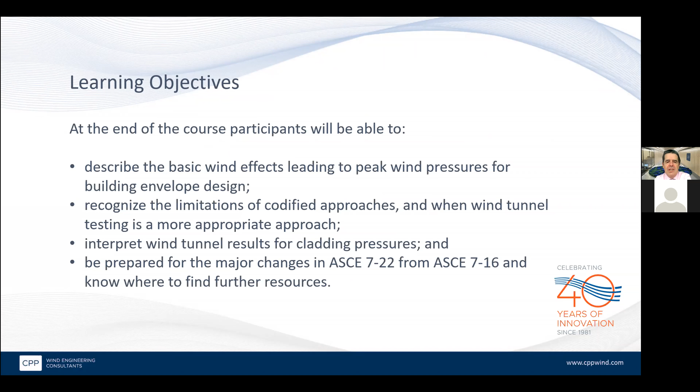There we go. So this presentation is being submitted right now for AIA accreditation, so hopefully we'll get that through in the next couple of weeks, but these are the wonderful AIA learning objectives, which you can happily ignore while we talk through the rest of it.

So you're probably all aware of the codes. I mean, there's just a collection of them from 705 to 710 to 716, the ASCE SEI loading standard. And what you'll have noticed is that every time they republish one, it keeps getting bigger. But does it have all the answers? No, it really doesn't. There are limitations, and the code itself does recognize the limitations.

This is just to remind you that the new 722 has just come out. I don't have a physical copy of it in hand yet, so I don't know quite how thick that is compared with the others, but we have taken some stuff out, and we've put a heck of a lot of other stuff in. So it's probably gonna be a little bit thicker again.

So the code does kind of limit you in what you can use it for, the standards. It says you can use the standard to get the wind loads, the local building envelope pressures, if it complies with the following conditions.

The structure is a regular shaped structure. Well, that's open to a bit of interpretation, and I don't know many architects who like to consider their work as particularly regular shaped. Then the second condition, applicable to building envelopes, says it doesn't have a site location where you're going to see channeling effects or buffeting in the wake of upwind obstructions warranting special consideration.

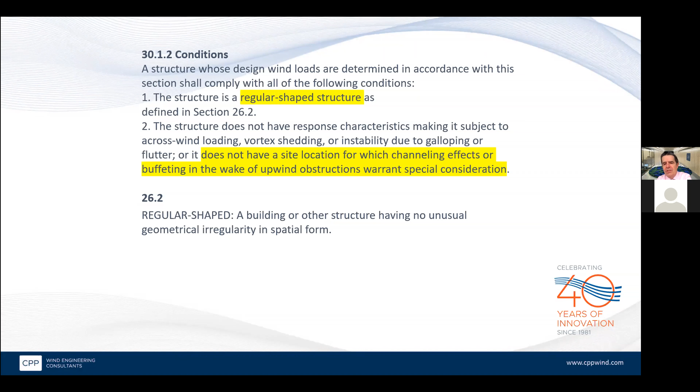Where does that start and finish? Just a box? Yeah, arguable. So we'll look at some examples of things that you can consider regular shaped, and a few others that definitely fall out of that category.

So let's just look at some of the basics first, though. Here we've got this is just a time history of wind, showing wind speed in some non-dimensional unit. Let's just call it miles per hour up the left, and then time in seconds along the x-axis there.

And what you'll see is we get three components to the velocity. We've got the longitudinal velocity, so that's the speed in the direction of the wind. And then we have a lateral and a vertical component. And you'll see that all three fluctuate. As you'd expect, the lateral and vertical components have a mean average wind speed of about 0, whereas your longitudinal has that very definite mean value.

But that fluctuation is the turbulence in the wind, it's the gustiness. And that's what makes what we do very different from anything like wind tunnel testing of cars, planes, or aerodynamics of more regular, much smaller bodies. Because when we're doing buildings, they're much bigger than the size of a lot of this turbulence or gustiness in the wind.

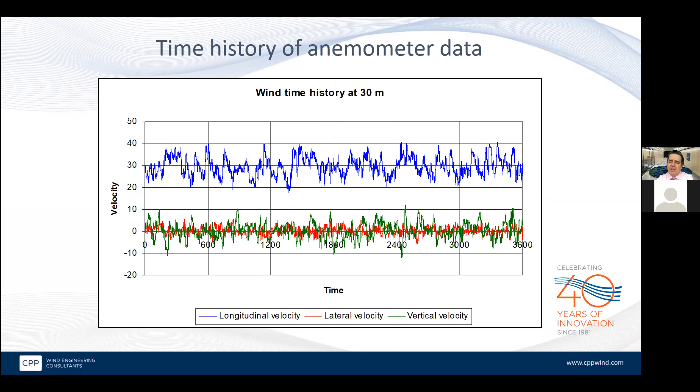It's a function of that. All the pressures are a function of this gustiness, and we'll keep coming back to that.

The first bit of everything we do in any wind loading study, looking at pressures, is to say, what do we know about the wind speed with return period or mean recurrence interval? Because that determines what you pick based on the standards in terms of the levels of reliability that you want to achieve. So typically, if you're thinking a risk category 2 building, you're right on your 700 years. Whereas this is just an example graph from a petrochemical facility we were doing, where they have to design for a 10,000 year mean recurrence interval.

And we also have to look at any site at all the different types of storms. So what you'll see is the pink line there, and that's a statistical fit to historical data from usually an airport somewhere or some other meteorological station. So what we do is we go through however long, usually looking at 10, 20, 30 years worth of data.

And we go through and we sort out all the individual storms, and we rank them. And then we plot this, what we call a Gumbel fit to it. And that gives us a curve of wind speed versus mean recurrence interval.

This one was not that far inland from the East Coast, so we had to consider hurricanes. Hurricanes are a thing that you don't have enough historical data on to be able to fit. So that's done through what we call a Monte Carlo simulation. And that's used throughout to come up with the wind speeds, and the hurricane course is in the code as well.

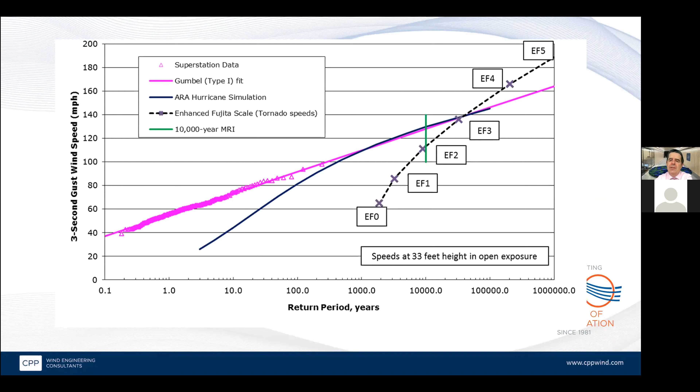Now that was just the all direction wind speed we looked at in the last graph, but we also need to consider how does the wind speed vary with direction. And this is the big difference between doing a wind tunnel study for building envelope pressures versus using the code.

So the code is going to give you one wind speed that comes from all directions and then allow you to use a Kd factor to get a little bit of a reduction. And we will talk about the Kd factor because it's something that is not well understood by a lot of practitioners in the field, what it actually does. And we'll have a little example of that later on.

So what you see here is we've calculated the wind speeds from all directions. We then scale that up, the green, so this is actually for Seattle. We got 98 mile an hour design wind speed for risk category 2. So we've scaled that up and we then put a lower bound on those wind speeds as well, so that there's no direction that we're giving undue attention for. And that's usually to get a pressure factor of about 0.67, give or take.

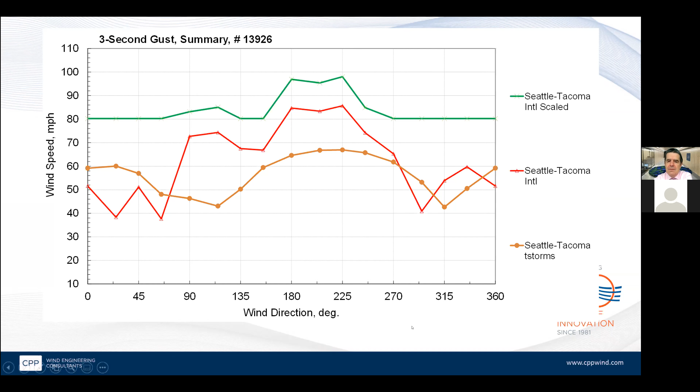So what we've had in the States, as we've had in many other countries around the world, is mid-90s or so, the introduction of automatic weather stations, which meant we get much more reliable, more consistent data. We've also updated our statistical analysis techniques a bit, so that lets us trim things here and there.

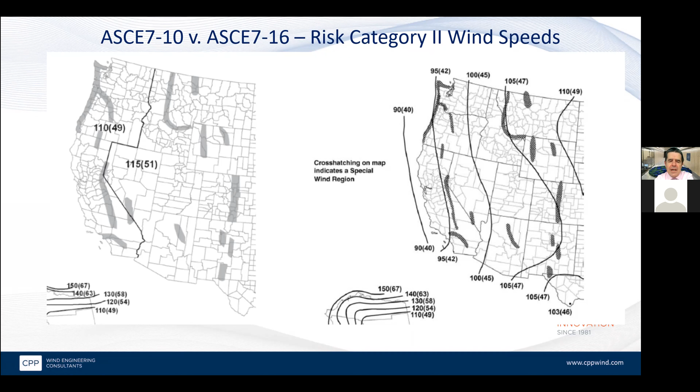And that caused a bit of controversy within the code, but at the same time, it took some of the stuff that had been adjusted correctly, and went back to an earlier version, which wasn't quite as clever. And what we're going to see when we look at the 7-22 map a little later on is that that has been adjusted in a number of these areas and been corrected out for the next version. So just something to be aware of.

The other bit that we talked about, or we need to talk about, is the boundary layer. So this is again what makes it different from working in nice, smooth flow, uniform flow like you'd do with a more aerodynamic thing.

The wind speed increases with height above the ground, or more correctly, it actually slows down the closer you get to the ground. And that's just from the surface roughness, the obstructions on the ground, creating a frictional effect and slowing the wind down. So if you're in a very dense urban environment, you slow it down more, you're going to see that effect on the wind speed for a greater height. It's going to be gustier. So that's really going from right to left, your exposure category D, going to your C, to your B, and then what used to be an A.

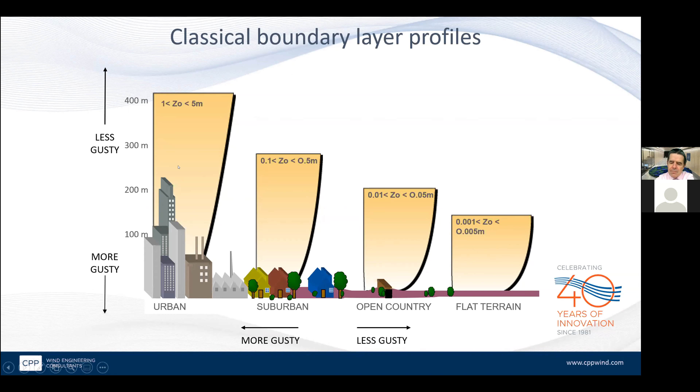And when we come to do our wind tunnel test, that's something that we need to be able to mimic or simulate.

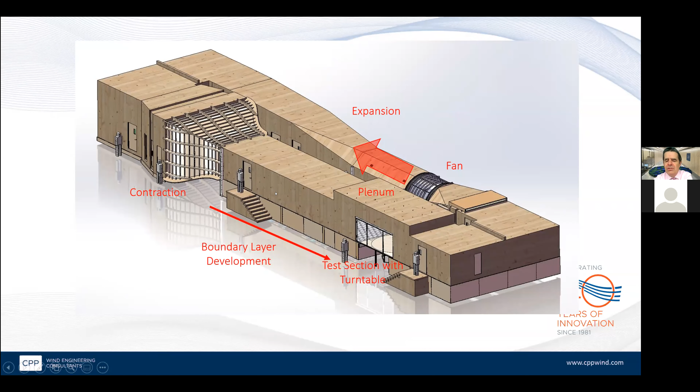So if we look inside or on the outside of a typical modern boundary layer wind tunnel, you'll see it's pretty big. Here's our wind tunnel technician standing around. They're usually reasonably tall, so let's just say they're about 5'10". Gives you an idea of the scale. So this section here, where you see boundary layer development through the working section, that's about 70 feet long. So it's quite a long thing. We get a good 100 feet total length of the tunnel. Fans around the back, and the flow circulates around. And that's what it looks like on the outside.

So fairly substantial. If we look on the inside, here's what we've got to model that boundary layer. And there's some key bits here. So you'll see we've got some spires.

We've got a little trip board, adjustable in height, and there's roughness on the floor that's also adjustable. So we adjust that for every direction to correctly mimic the boundary layer we'd expect from that direction based on the far field roughness upwind.

Then once we get in closer to the building we're testing, and this is just a little one in Austin, what we've got is all the surrounding buildings, usually within anywhere between 1,200 and 2,000 feet radius of the site.

That's the radius we'd expect to have a measurable specific influence on the building we're testing. The turntable lets us rotate it, usually tested at 10-degree intervals, and we rotate it round and test all those directions to get a complete picture of the variation of pressures with wind direction. So we can then pick, or calculate, the appropriate pressure for the appropriate mean recurrence interval.

Roy, we had a question.

Are the number of spires variable? Yes, right, but no. So technically, yes, they are. You could do that, but we don't. We used to, in the old tunnel, we'd do that, but now they're set up so they slide up and down and give different blockage. But if we wanted to go in and change the number for some reason, yes, we could do that, Nathan. Okay, thanks for that, Chris.

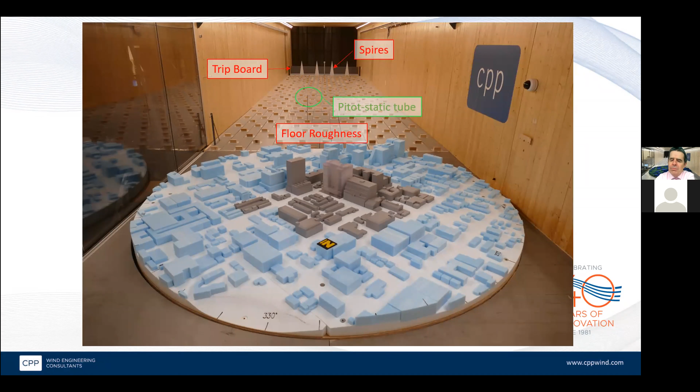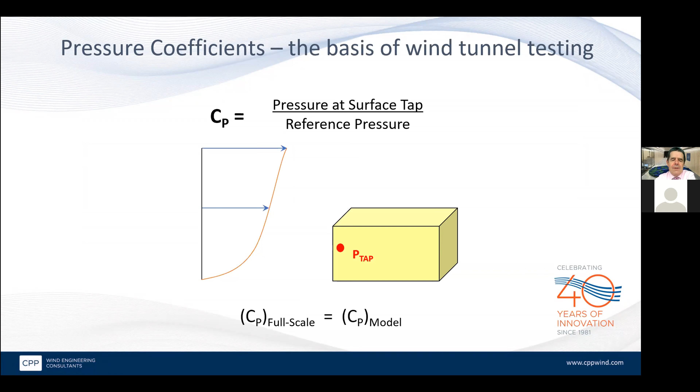That gives us our reference pressure in the wind tunnel. Then we're measuring pressures at a tap, a little hole in the building model, and that pressure coefficient is the same as the Cp you see in the codes and standards. The pressure at that surface tap divided by the reference pressure gives us that pressure coefficient. When working in the boundary layer wind tunnel, in turbulent flow with sharp-edged bodies, that pressure coefficient at full scale is the same as the model scale one we measure. That's the basis of absolutely everything we do, and it's what we call Reynolds number dissimilarity. We can get away with it.

So let's just look a little closer at one of these models. This is probably a fairly irregularly shaped building in the middle, a Frank Gehry special. It's the Grand project in Los Angeles, which we worked on with a good structural engineer, DCI, Scott Erickson and his team, a few years ago.

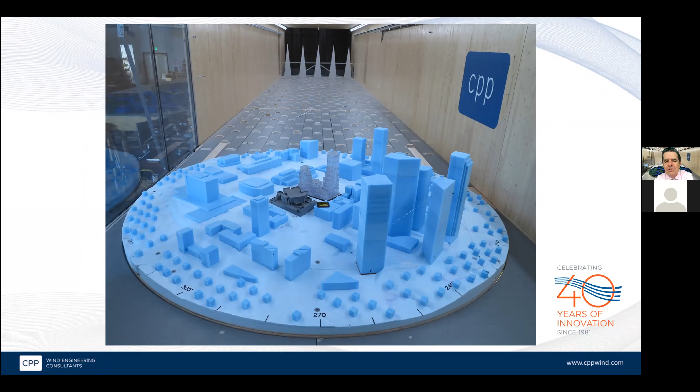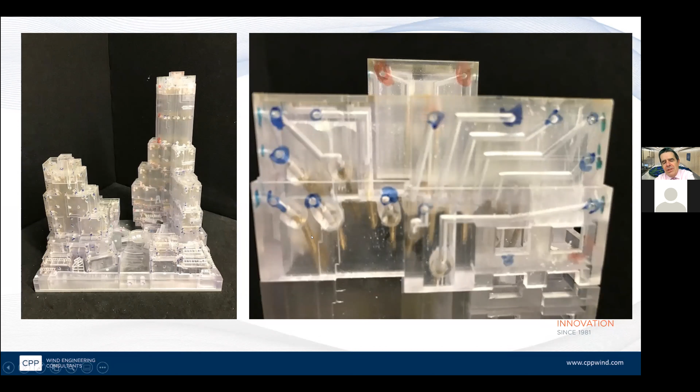If we look at the model, this one had somewhere in the range of 1,200 separate pressure taps distributed all over it. If we zoom in here near these roof fins, you see the little hole marked out in blue, then you see that tube being drawn through the model, and little bits of brass on the inside. If we look at the inside, that's what you're seeing, all those little brass connectors going into the holes through to the outside. Then they all get connected up to this spaghetti of tubing that disappears through the floor of the wind tunnel to these banks of thousands of pressure transducers underneath.

So whenever you do some of this wind tunnel testing, you spend a heck of a lot more time doing the setup and the calibration, the preparation, than the real testing.

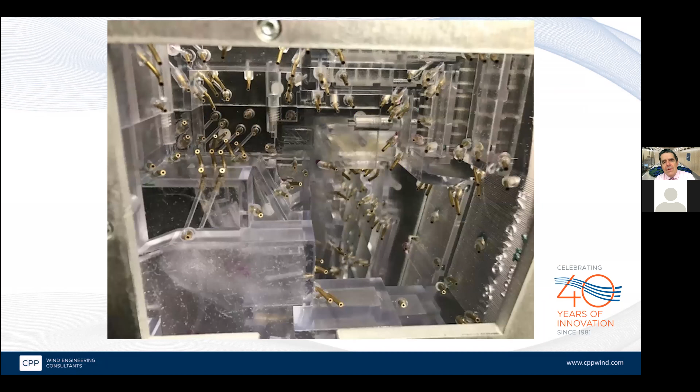Do you have a maximum number of those? Yeah, so we've got two systems that run at 1,024 taps each at the moment. In theory, if we ever needed to, we could double them up and piggyback them to get 2,000 at once. But what usually constrains you is, if you look at the inside of the model, there's only so many tubes you can get out through the bottom of the model at once. So it's usually a scale constraint that limits how many you come out at once.

This picture here is a particularly large number because this was under the model on top of that. That picture was the Marina Bay Sands project in Singapore, which had this huge convention center roof, so we had a massive area underneath for bringing out those pressure tubes.

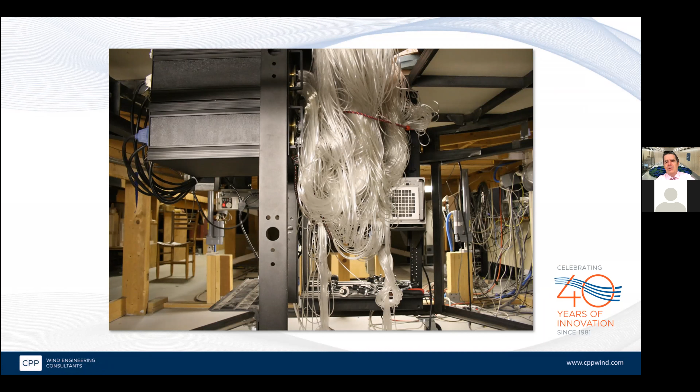One thing to remember is, where did all those code coefficients come from? They came from wind tunnel testing. So rather than a generalized set of coefficients put in the code to try and envelope the majority of building cases, we're getting something building specific. We're ensuring that design reliability is met, but we're also able to show that those code coefficients are conservative in a lot of areas for individual buildings.

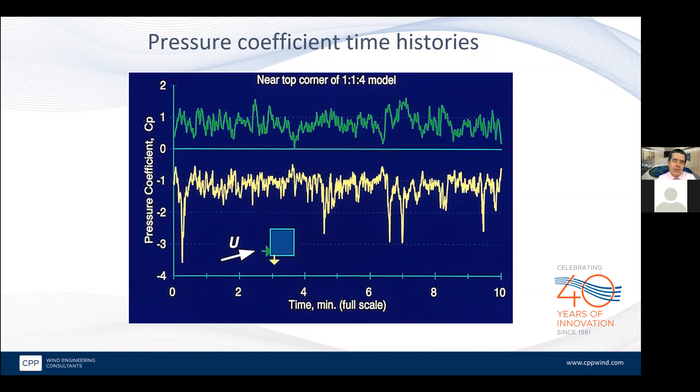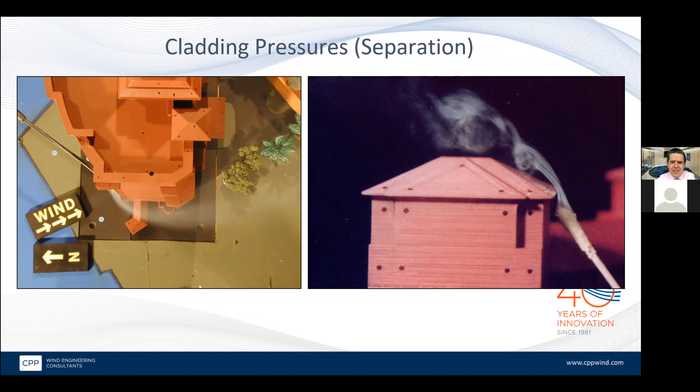I should say this picture on the right was back when we were allowed to use nice smoke that gave really good pictures for this kind of thing. They've kind of banned us from using that now - some health and safety nonsense that when it reacts with water, it turns to hydrochloric acid. So you did used to get the occasional stingy eyes and burning lungs if you'd been in there too long.

But here's another example, and this is just a little movie. Let me just make sure I get the sound off on this. There we go.

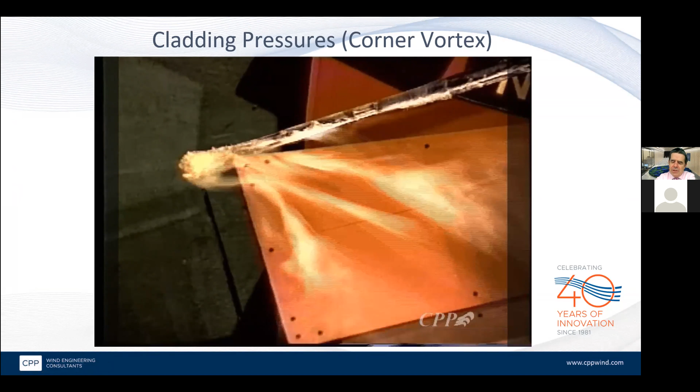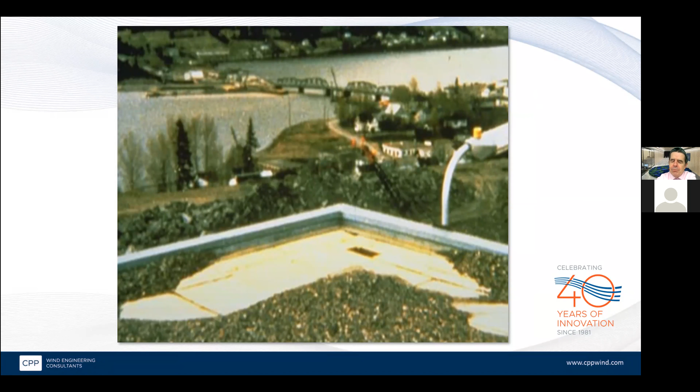And you go, well, actually, yes - here's an example. This is actually 30 years old now, this picture. It was from the Burger King headquarters after Hurricane Andrew, I believe in '92, and you've got that perfect V scar. When you're thinking about green roofs, landscape roofs, we kind of know that you're not meant to put gravel up there, but this is the same effect we're seeing - consistently scouring out some of the green roofs and preventing them performing in the way they've been designed.

It's an interesting one in that we developed a lot of the science for doing this on the basis of failures that had been observed. And as sometimes happens with these things, we had manufacturers who initially didn't like the loads that we were coming up with and saying these are the recommended loads.

After Superstorm Sandy came up the East Coast, probably about 10 or 12 years ago now, you had a whole bunch of these ballasted roof mount solar arrays end up in piles in the corners of the roof. That's when they started saying, all right, maybe you guys did get it right.

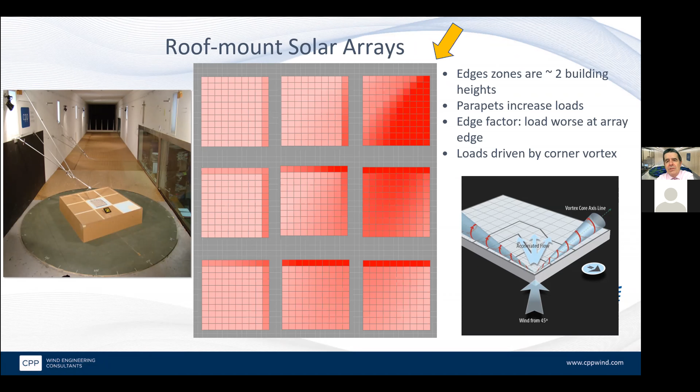And so a lot of this work has gone into the numbers that are currently in the standards for doing this. But what you'll see is the edge zones extend about 2 building heights in from the edge of the roof, and the loads typically go up when you add the parapets. So just important stuff to know.

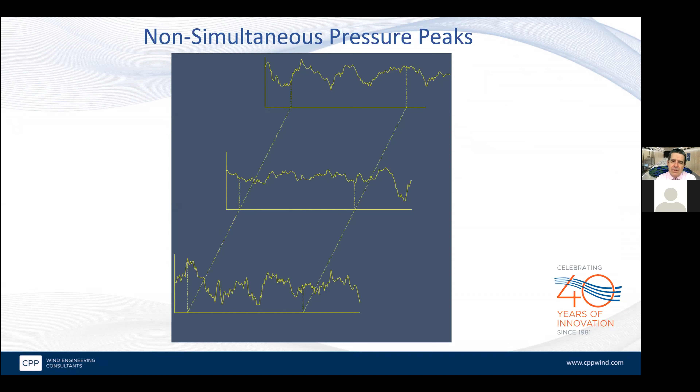The other bit that is very important in everything we do - this is just three graphs of pressure time history at different locations across a roof with time. What we're showing here is that when the peak occurs in one, the bottom one there, the pressures are lower elsewhere. And that's why we get the area reductions in the code. So the bigger bit of building envelope you've got there that load shares, then the more the pressures come down. And it's just that area apart.

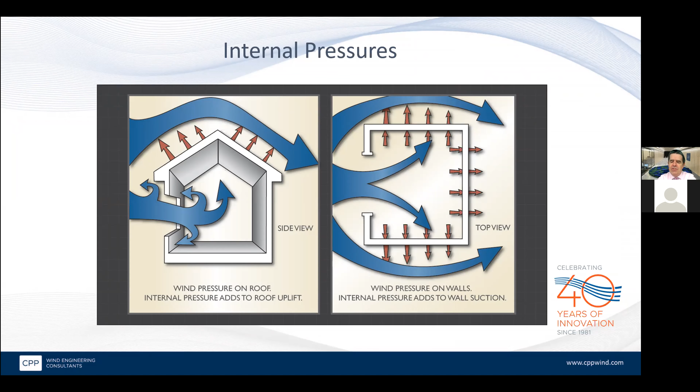The other bit to be really aware of is your approach to internal pressures. So you've got the external pressure caused by the wind, but if you've got any leakage or openings in your building envelope, then you develop an internal pressure. And that can work for or against you, depending which side of the building you're looking at. But generally that gives you an increase.

So what you'll see is these are the classifications that are in the code. You've got enclosed buildings, which have a pressure coefficient of 0.18. And you say, yeah, that's because not much wind is getting in there to leak in.

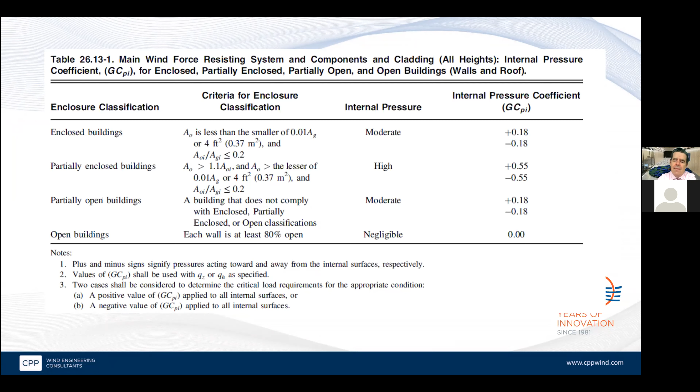You're partially enclosed buildings, which says, well, actually we've got a fairly small hole or something getting closer to a dominant opening. Then that pressure coefficient potentially goes up because more of that pressure can transfer to the inside of the building. Then a partially open building, you're saying, well, actually we've got so much leakage that most of that pressure is getting back out again. And open buildings, which are pretty much as you see, there's not enough building enclosure to generate that internal pressure.

So this is a building you might recognize, being in Seattle. It's the Nexus building on Howell Street. And it's a nice little example of how we do a little bit of wind tunnel testing.

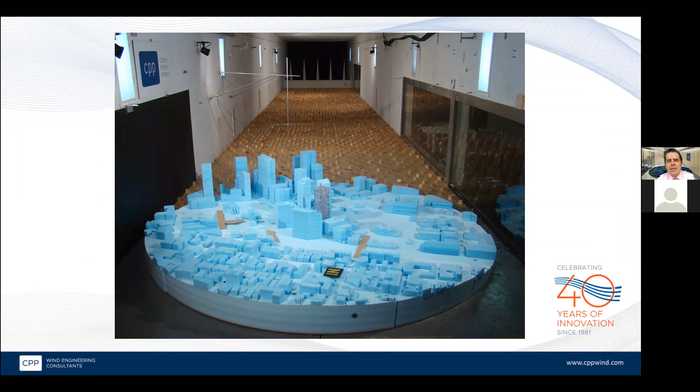So there we go. There's the building with its nice proximity model. We had about 1,600 to 1,800 feet surrounding that in the model, with Seattle as was. But what I'm going to show you is we ran 2 tests on this one. So the building - you've got those sort of stacked, slightly rotated sections with some indents every so often. So the question came up, is that hurting or harming our wind loading?

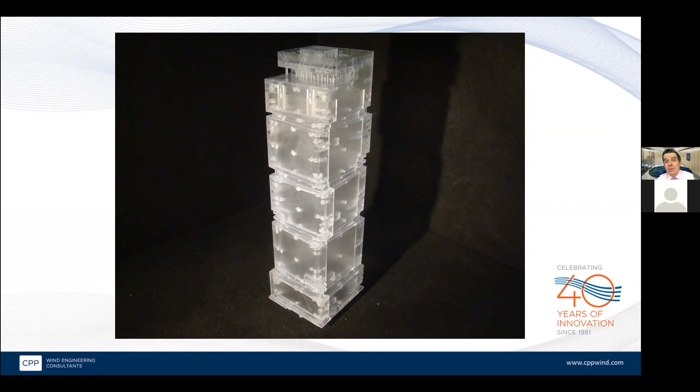And the structural engineer, who's KPFF on this one, was interested in that as well. So we said, all right, tell you what, let's run a more standard model as if you just had that uniform floor plate going straight up and down. So that's kind of what we've got there.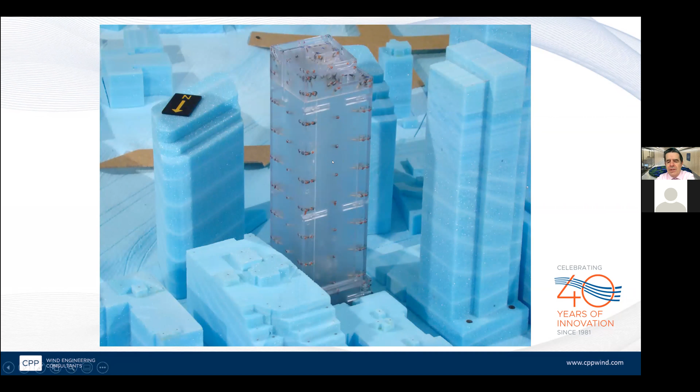In this case, it became reasonably straightforward in that you've got typically higher negative pressures near the top of the building where the wind speeds are higher, reasonably moderate pressures in the middle of the building, and then typically, once you get down a little bit lower, you'll often find the pressures increasing again. And that's because you get washed down the face of the building.

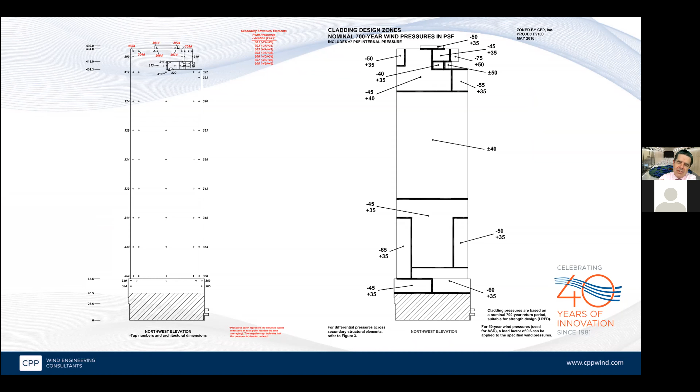And then this wind says, right, how do I now get around the building? So it's getting down near to the ground, it's being swept around, so you get this accelerated flow around the building. It's the same thing that gives you those gusts of wind or that accelerated wind as you walk about the city and go around the corner.

I think that actually answers an earlier question that I didn't get to. Yeah, but we've got another from Brett asking about apartments.

What type of enclosure classification does CPP recommend, considering that windows may be left open?

So the enclosure classification is always a discussion with the end client or tenants, depending what you've got, in terms of building management plans, as well as the degree of operability of the facade. And that's very dependent on the wind climate as well. So for instance, if you're working down on the Hurricane Coast in South Florida, for a commercial building, they have very advanced hurricane planning and building management procedures, so you assume that's closed - you get days and days of notice. Most apartment buildings there, you're going to assume they're going to be sealed in that event.

If you're working somewhere with a more thunderstorm dominated wind climate, that's one where it's not as predictable. It's quite likely someone's gone out to the shop and left their windows open in their apartment. So it's always a discussion with the client. If there's a reasonable possibility of parts of the building envelope being left open, then it can be wise to consider it being partially enclosed. But again, it's a discussion with the end clients and the whole design team to determine what's most appropriate.

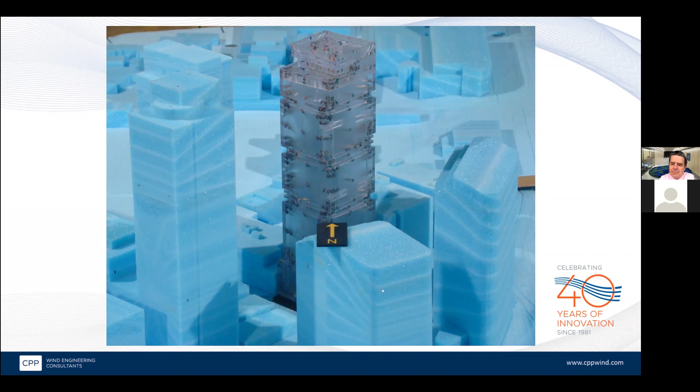So that's one where we looked at a potential change in building shape. This is another one where we looked at an actual change in building shape - this is the UAE's pavilion at Expo 2020 in Dubai, where it's designed to look kind of like a falcon. It's a Calatrava project, with these feathers coming around. The falcon is a big thing in the UAE and the Arab states, a great prestigious thing - it's kind of their national emblem and animal.

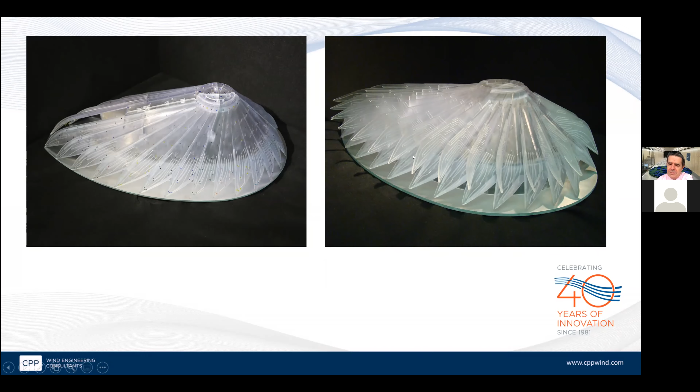These feathers lift up to reveal solar panels underneath. So in this case, because we've got multiple different forms, primarily we just run them fully open or fully closed - it was a building that had to be tested in two different formats. And that's definitely something you could never say was a regular shaped building. What you'll see there is the wind tunnel model, which looks remarkably like a photo I took when I went out there the other month to look at it as built. You'll see these pressure tubes running through the material, and they're always almost in pairs - that's to let us measure simultaneously the pressure on both sides to get the net load on those open wings.

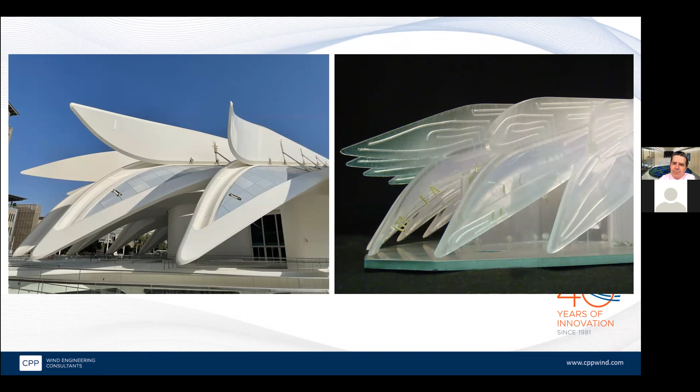So that's one where you've got an obvious change in the aerodynamics between those two conditions. This is another interesting example of where the aerodynamics potentially change. And this comes back to what you should consider for your internal pressures.

This is the Las Vegas Raiders arena in Vegas. I don't know how many of you have seen it, but it has this huge opening, where you can get a view down of the strip from inside the arena. Massive doors slide open and create this huge opening. So that's one where we worked with the whole team to say, here are the pressures and the load distributions with these closed. We also tested with them open, so we had to measure pressures on the inside as well.

Then we worked with the team to come up with a management plan, because out there, thunderstorms are going to give you some of your highest wind loads - how to forecast them, how to come up with a plan for closing the doors if they're open when the weather service says there are thunderstorms in the region. Then a backup plan if there was an electrical failure, to be able to manually close them. And then a full reliability analysis to show that even if they did get stuck open, here's the level of reliability you have left, here's our additional capacity. Fascinating project, but again, it goes back to that internal pressure question.

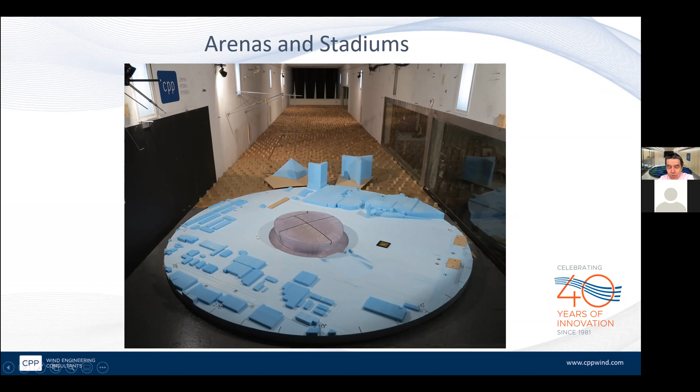Other fun things at the moment: paver systems, loose-laid paver systems. These are a couple that didn't work so well. A lot of these just rely on their self-weight, and you'll see these ones are pretty skinny, lightweight. You get the same uplift pressures on those. If the uplift pressure exceeds the weight, then they're going to take off. Once the first one goes, you tend to get this cascading effect, because now the wind can get down into the cavity and just start peeling them back.

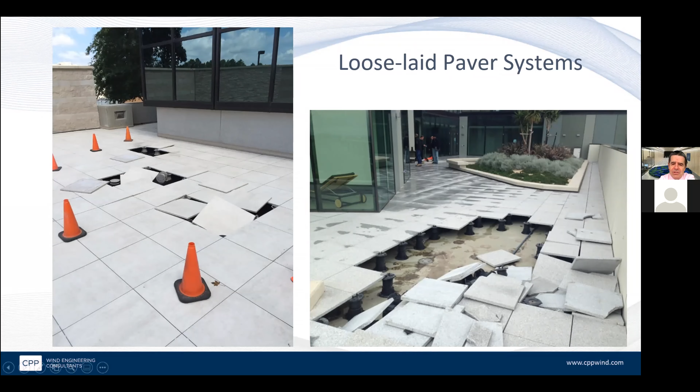Wind noise happens at all kinds of scales. We've been working on this kind of perforated material that likes to whistle, and in this case it was actually the gaps between the panels, which weren't lapped together, that caused the primary noise. We've also seen it with straight plates with their own perforation pattern. So if you're specifying that, or see it specified in a project, ask the supplier if they've done testing and they'll guarantee it's not going to make noise.

Because once you get them on site, and I know of at least one here in Seattle, not a million miles from where I'm sitting right now, that wails like a banshee on a particularly windy day. And that too is an interesting one, in that the building owner, obviously not very happy, went back to their design team and said, got to fix it. The design team looked at it, decided what they thought the cause of the noise was, and applied a fix without actually testing that that's what the cause was, and it didn't really help. So we got brought in later to do a proper investigation, work out what the source of the noise was, and come up with some mitigations.

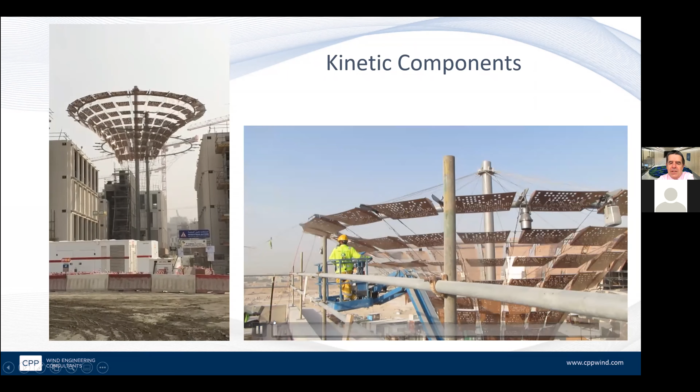So here's some other perforated components, and this is just another little cautionary tale. This is a sort of kinetic sunshade, and each of these panels is able to rotate and swing. But what you've got here, because you've got a dynamic structure, is feedback between the plates and that central mast. This video on the left was taken just a few hours after these panels had been installed, and you can see it swinging fairly significantly backwards and forwards. This is at the Expo 2020 site in Dubai, where there's, I think, 50, 55 of these going up, and this was the first one to get the panels on. So you get out there, and with a bit of rope, you can really get these things moving. It's kind of fun. So just watch, when you've got kinetic elements on the building envelope or the structure, think about how the feedback is going to come back.

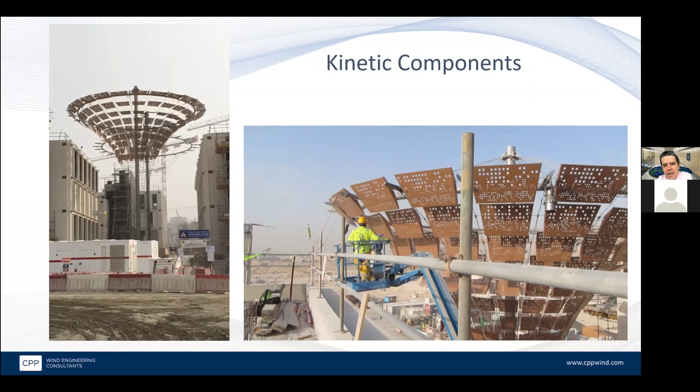So that's some of the final ones. Once these all got tied together, that problem ceased to exist. Just some cable netting went across, some additional stuff, and that settled everything down.

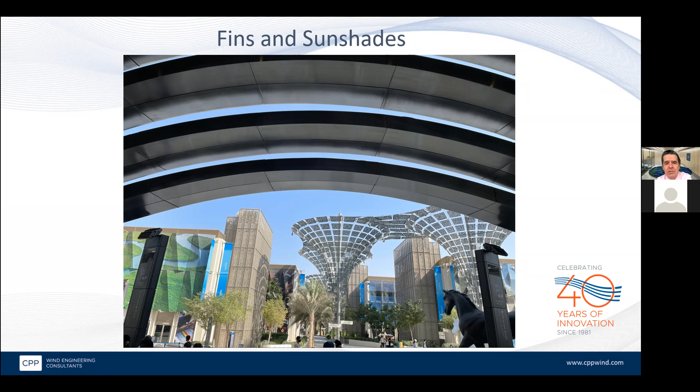Now, what we're also looking at through here, we're seeing some sunshades, and this is on the Mobility or Opportunity Pavilion, I forget which one it was. It was a Foster's designed one. So this is what these look like from the outside, and it was determined that these had a potential to vibrate significantly in the wind. I think it was possibly slightly overstated, but as a result, each of these has got, I think, on average about six little tuned mass dampers inside, just to mitigate it. So it's a component of the building enclosure, the building envelope, but it has a significant dynamic structural response, or potential dynamic structural response. We see that at much smaller scales as well sometimes.

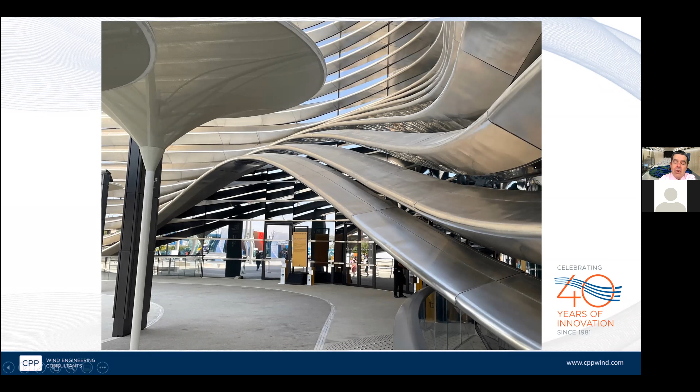So we've seen sunshades and louvered sunshades in buildings where the individual louvers start vibrating at quite high frequency and can fatigue and fail, or they make such a hideous noise that they need a little bit of treatment to calm them down.

So one of the questions I get asked on a very regular basis is when to wind tunnel test. And my answer is always as soon as it's practical to do so. So in terms of the building enclosure, the building envelope, for normal buildings and structures, as soon as you've got that form, you don't need to know the materials you're going to build it from, or going to use initially. But you do need to know what shape it's going to be.

One of the things that we find in wind engineering is that there tends to be a bit of an assumption that we go in and do the wind tunnel testing, and it's a bit like doing a component test: you do it, you prove it, there's the numbers, and you do no more. It shouldn't be that way. You get much more out of a wind tunnel if you use the engineers who've done it to actually do some consulting as the project develops.

So as you're looking and saying, well, actually, we want to change from this type of system here, we're going to move it slightly this way, maybe move that 12 feet, and maybe that wanders into one of the other pressure design zones on the elevations we looked at before. If you get that, go back to your wind tunnel consultant and say, look, how fixed is that line? Because we're making assumptions, and it may be a few feet here or there. We've got a bit of conservatism. We can make that a little bit better, you know?

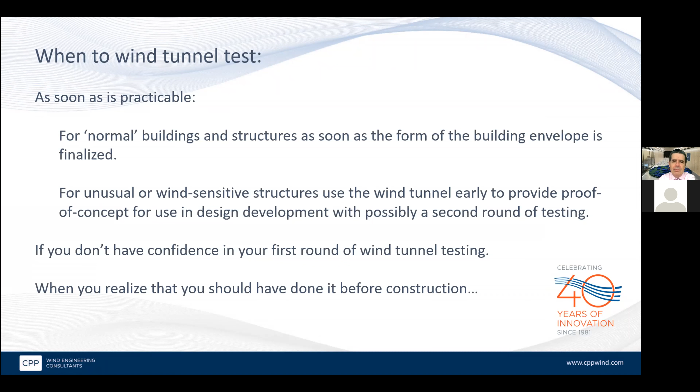So what are some reference sources if you want to read more about wind tunnel testing? There's a standard that sets out minimum standards for wind tunnel testing of buildings and other structures—refer to that when sending out a request for proposal, and make sure consultants are following it. There's also Manual of Practice 67 from the SEI, which has a lot of background information. It's out of print now, but only slightly dated, and it's pretty in-depth.

For taller buildings, there's SEI Manual of Practice 143, just published last year, on design and performance of tall buildings for wind. It gives a really nice overview of all the pieces involved, largely from a structural point of view, but with some building envelope content too. There's also a guide from the Council on Tall Buildings and Urban Habitat—again tall building specific, but written in plain English, or since I wrote large parts of it, plain Scottish maybe.

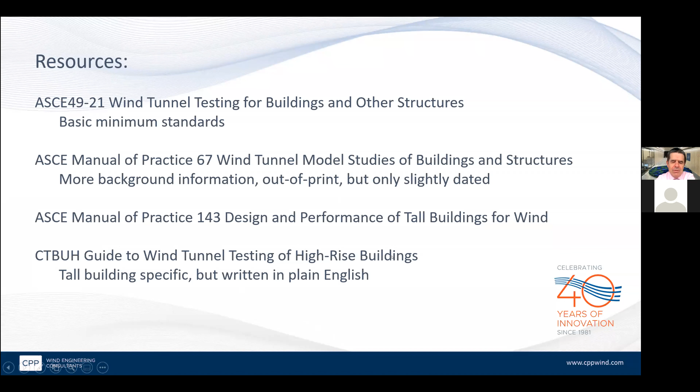I did have one question. The question from Jeff reads: how are design solutions to build conditions determined? Are they modeled, site tested, mocked up, or something else? I think he's talking about solving problems in the field or testing solutions.

If you're running up against a problem in the field, you've got to try to work out the cause, and it's really horses for courses. Sometimes we think maybe there's some huge pressure that the code wouldn't have predicted, so you go in, test it, and confirm that yes, it was under-specified—here's what it needs to be specified for.

Other times, like with noise issues, we do plenty of just taking prototype samples and testing those. There was a project in Las Vegas making really unpleasant wind noises, due to a cavity resonance you wouldn't have expected between sunshades. That was one where we spent three to four months convincing ourselves that was the cause of the problem, because it couldn't be modeled—it only appeared at full scale in the field. We had arrays of microphones across the roof deck between the two towers, working out phase shifts and doing computational modeling of the pressure waves to see if it was repeatable. It's always good fun doing that stuff, but challenging.

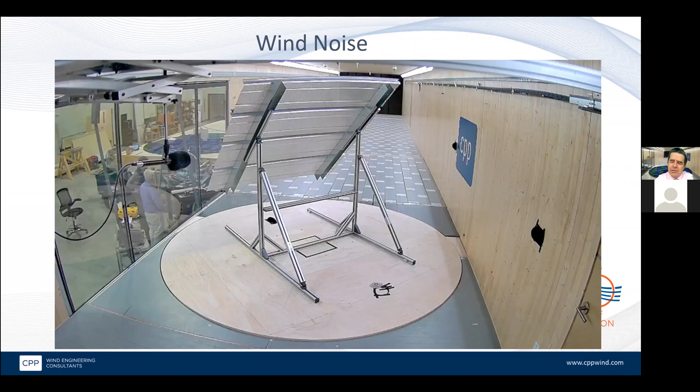Okay. Let's zoom back down to where we are.

The other one you may come across at the moment is the Prestandard for Performance-Based Wind Design. That was published in 2019, I think. A lot of that is to do with structural design, allowing some degree of plastic behavior in the structure while showing that reliability goals are still being met. But there's a very large chapter on the building envelope. So if you're going to do performance-based wind design for the structure, that's all well and good, but you're not protecting the contents of the building unless you have an equal reliability in the building envelope. So if you do performance-based design for the structure, you have to also do it for the building envelope. If you want to do performance-based design for the envelope, it permits you to do that without doing the structure - it kind of works both ways, but it's definitely worth a read. And you can download that from ASCE for free - it's not one you need to pay for, which is good news.

But we'll get on to a little bit of reliability coming up. So let's have a quick chat about major changes that are going to affect building envelopes and enclosures from ASCE 716 to 722.

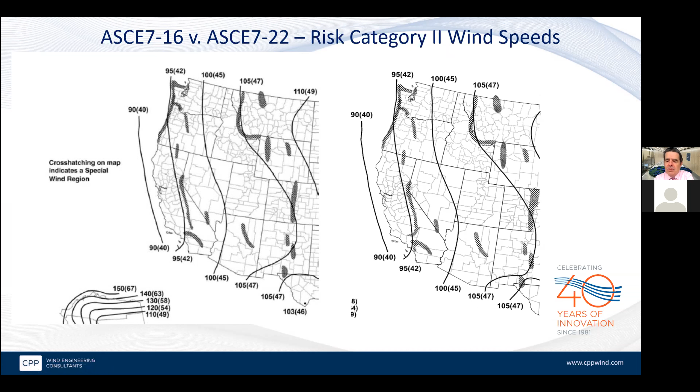So generally the 722 maps are a bit more reliable. The one place outside special wind regions where we do see a significant change in 722 is down around the hurricane coast. Your extreme areas like southern Florida, no change. Around the Panhandle, there's a bit of a change in that the wind speed contours are getting closer to the coast.

And that was a finding from Hurricane Michael, which tracked in much faster than the models would have anticipated. It was almost impossible to replicate that with the current models. So that went back to the hurricane modelers, and as a result they modified their models and changed them until it could replicate that. So that's one of those bits where we're starting to think, yeah, we do really have to plan for some of the global warming and climate change. This is possibly one of the bits of it.

And there is a panel being set up at the moment to look into what we ought to be doing as an industry in terms of anticipating climate change, accounting for it in some of these wind speeds, which are, for the most part, anywhere inland away from the hurricane coast and on the west coast, derived purely from historical data.

The other bit that we've got in 722: it's still got those wind speed maps we looked at, but what you'll see is the hazard tool from ASCE 7 that is now completely open, full access at no cost. So that becomes the reference rather than just the maps in the code, which is good.

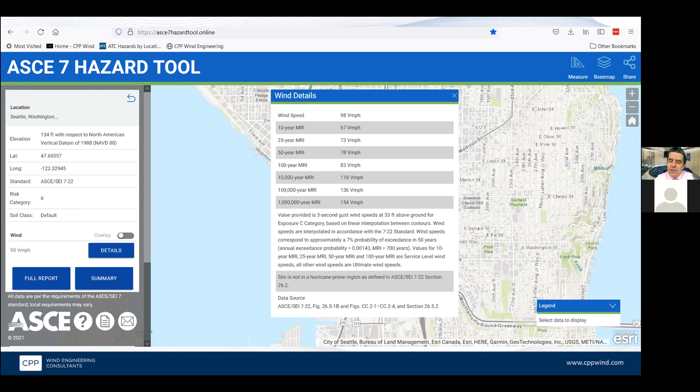And it'll also give you a nice PDF printout, if you're into that kind of thing, to chuck into your design documentation.

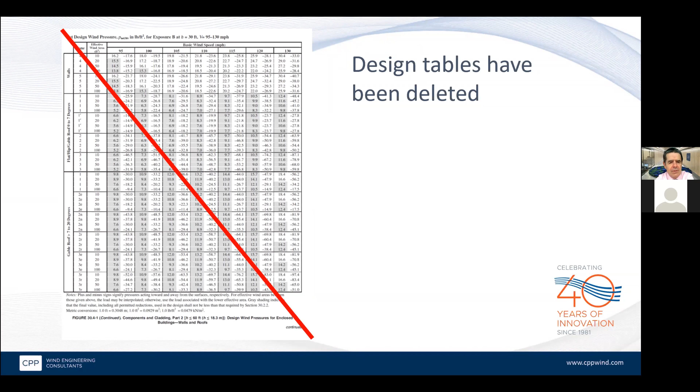One thing you will notice is that the design tables have been deleted. They were kind of the shortcut so you weren't doing all the calculations. But it was pretty much a decision of the committee that design tables like that belonged in design guides rather than the standard itself. I think relatively few people were using them, because most people have got something coded up themselves to do the code calculations for them. So that's one thing that's made it a little bit thinner.

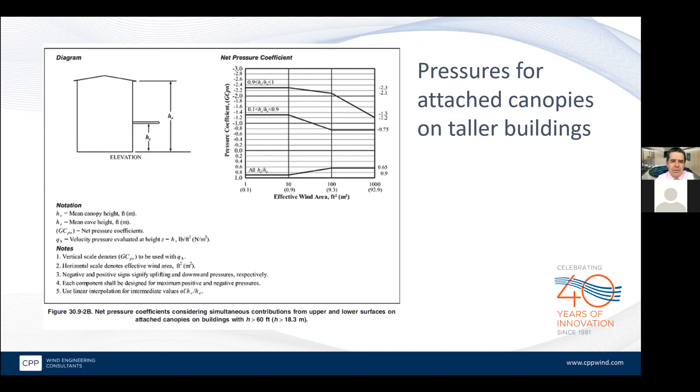We also have pressure coefficients now for canopies on taller buildings. In previous versions it only got you up to buildings of 60 feet; we now have that for buildings over 60 feet. That's been something that's been missing for a while, so that's a great addition that I think you're going to find really useful.

We also have something on roof pavers. We looked at some roof paver failures before. What we didn't talk about is the fact that if you designed your roof paver to resist your pure roof uplift pressures, you would be conservative for elevated pavers. And the reason for that is that you've got little gaps between the pavers, and that allows some degree of pressure equalization, which reduces the effective pressure on them.

So we've now got an allowance to do that, to come up with a net uplift pressure coefficient. Basically, you use your roof coefficient, or you determine the coefficients from wind tunnel tests performed in accordance with chapter 31, which is the one that says here's how you do your wind tunnel testing.

That now aligns much better with the ASCE 49 standard for wind tunnel testing, or determined by methods described in the recognized literature. The code says you can use code values, wind tunnel testing as an alternative route to compliance, or methods described in the recognized literature, which is basically anything that's been in some kind of peer-reviewed publication. That lets us introduce a reduction factor.

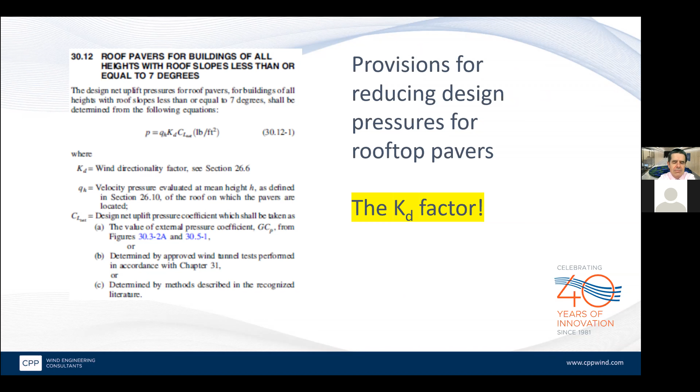So if you want a completely reliable building envelope as a whole, you really ought to be using a KD of 1. We tried to get that brought into the code, got a huge amount of kickback, but it's not a new idea - it's actually in a FEMA publication from about 10, 15 years ago, looking at mission critical facilities, saying for these, the ones with post-disaster functionality, you ought to be using a KD of 1. That's worth discussing with clients who have that post-disaster occupancy requirement - things like hospitals, or facilities with very high value contents, or where a period of inoperability would come at huge cost. One where we see that a lot right now is data centers. Just one to bear in mind.

Can you talk about the difference between LRFD strength design pressures versus allowable strength design pressures? Sure, so this is where it gets a little bit interesting.

Let's go back to the wind speed maps. This is what your wind speed maps look like now - these are wind speeds for the risk category you're interested in. Risk category 2 gives you 700 years, risk category 3 would be 1700 year wind speeds, and risk category 4 would be 3000 year.

Now if you go back to ASCE 7-05, what you had were wind speed maps for use with ASD design procedures. You calculated the pressure with that, then multiplied by 1.6 to get to the ultimate pressure. What that meant was that in terms of these contours in ASCE 7-05 and earlier versions, everyone thought they were 50-year contours. They weren't. They were nominal contours where inland it was about 50 years, but out at the coast it was rather higher because the rate of change of wind speed with return period is a much steeper curve in hurricane regions. So they were never 50-year wind speed maps - they were wind speed maps that once you calculate your pressure and use 1.6 on them would get you up to this 700-year wind loading event.

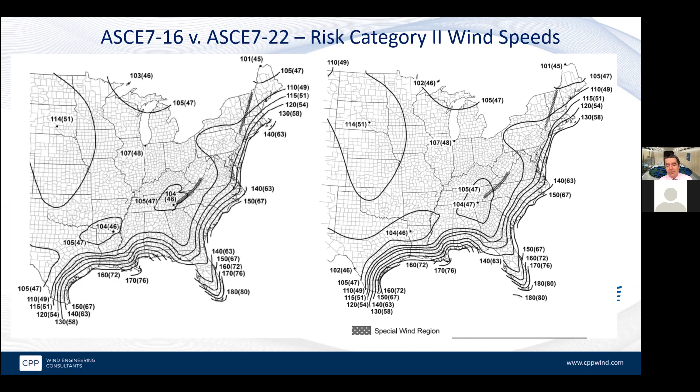Here's the other new bit in the code: there's now a chapter on tornado loads, and it is separate from wind loads. We're not considering this a wind event within the code, it's a tornado event.

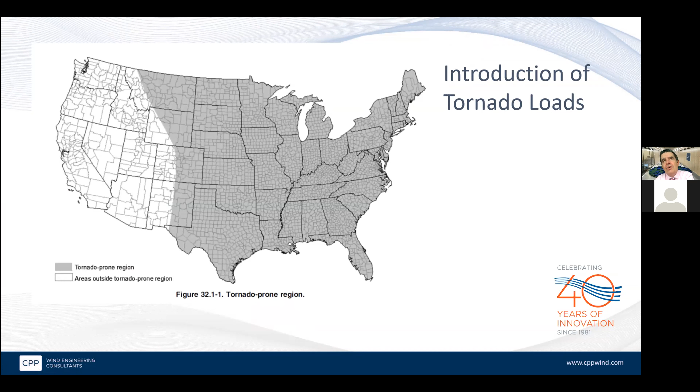There's a nice little map that shows tornado prone regions. If you're working on the west coast, forget about it. If you're anywhere east of the Rockies, you've got to give it consideration, but only for risk category 3 and risk category 4 structures. For a lot of this, it's going to be a quick check to show that it doesn't govern, but for some of the more critical and larger buildings, it will come into play.

So you've got wind speed maps or tornado speed maps for various risk categories, as you've got for wind, but they're also provided separately for different areas. The idea is that as the area of your project goes up, the more chance it's going to be hit by a tornado. Pretty simple, and that kind of makes sense. It uses a lot of the same techniques as the wind chapters, and in fact pulls some of the coefficients direct from the wind chapter.

So you get GCp coming straight out. But we've got a different internal pressure coefficient because you're more likely to have some penetration in the building envelope from flying debris. You've got a different directionality factor, and then you've got a pressure coefficient adjustment factor.

That's to recognize that the pressure coefficients we use through the rest of the standard have been developed from wind tunnel testing and classic boundary layer profiles, where there's no real vertical component to the mean flow, whereas we do have that within a tornado. So they did a whole bunch of tests on buildings canted at different angles relative to the flow and came up with a bit of a fudge factor, is what it really is. But it's kind of as good as we get.

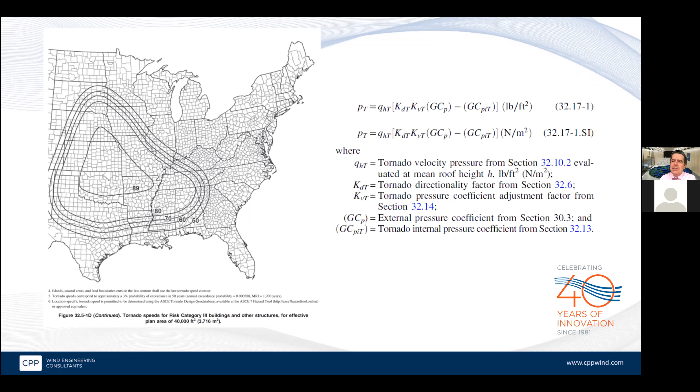And that's what I would say about the tornado chapter. There has been a fantastic amount of work put into it by a lot of really clever people, and it's a massive advance forward. Having said that, it's early days. Is it as fully developed as something would normally be before getting into a standard? I think it's fair to say that it's not. But is it correct to have it in the standard at this stage? Absolutely. When we look at the losses incurred each year from tornadoes, relative to wind, and the risk to life, it's absolutely right to be putting this in early. But it's one that you would expect to see develop fairly significantly over future versions of the code.

And that's about it. I've probably exhausted everyone. No, I think that was great, trying to go through too many things in about an hour. Yeah, no, great job.

I've got a couple more questions in the queue here, and if anybody else wants to add to the Q&A, please do. One from early on asks if the holes in the models weaken the model, and it looked like those are sort of 3D printed.

So all those models where we're measuring the pressures, you'll see they're SLA printed, so they're out of laser hardening resin, and that is airtight, which is why we use that, whereas some of the other 3D printing methods are not. But if you put in too many holes, yeah, you would weaken the model, but you also change the aerodynamics a little bit. Sure, but there's no significant weakening to the model.

And then in your wind tunnel, after the air comes rushing down the corridor behind you, where does it recirculate back into the other end? Yeah, there's a lot of different kinds of wind tunnels. All the ones that we run are recirculating wind tunnels, so it goes back around, and the fan is actually pulling the air past you rather than pushing it. Oh, so is that less turbulent? No, it's just more efficient.